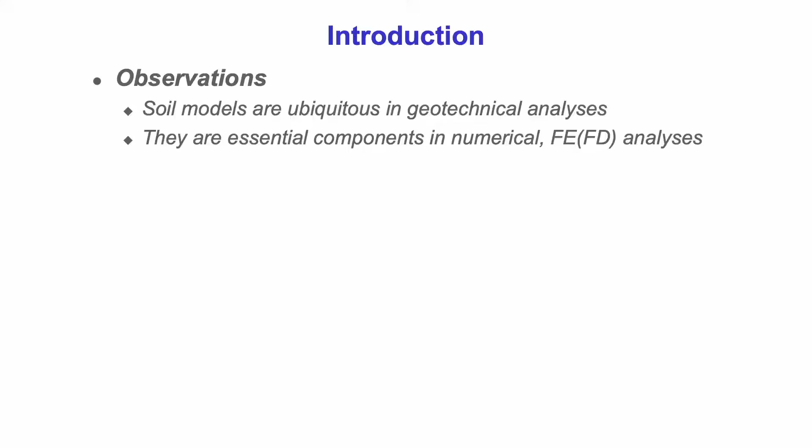My goal in the lecture is to share my experience in the development and application of soil models. Here I mean this to refer specifically to effective stress, strain, strength properties. I want to show you something about predictions of performance, some insights on geotechnical problem solving that I've gained, and I'm going to say very little bit about roles in design in this presentation today.

I'm reminded in advance that Karl Terzaghi himself wrote a book on theoretical soil mechanics in 1943, and he emphasized that theoretical soil mechanics was never an end in itself. And I just want to assure you that's the same philosophy I'm adopting here. So it's not so much about the model, it's about what you learn from the model and the lens it provides for problem solving.

Before I begin, I'm going to say the lecture's not going to do two things. It's not going to use any equations, because I think that's a little too much in a 1 hour session. And I'm not going to try and review the huge topic on the subject, because I know there are many other worthy pieces of work, but there just isn't time.

So my outline, what I intend to do is start by talking about soil behavior and generalized soil models. What do they do and what kinds of observations do they encompass? In the process of this, I'll show you some very interesting work we've done recently on modeling rate effects. This addresses a long-standing issue in geotechnical engineering about the hypothesis A versus B relation of consolidation and creep, which was first reported by Donald Taylor at MIT in 1942.

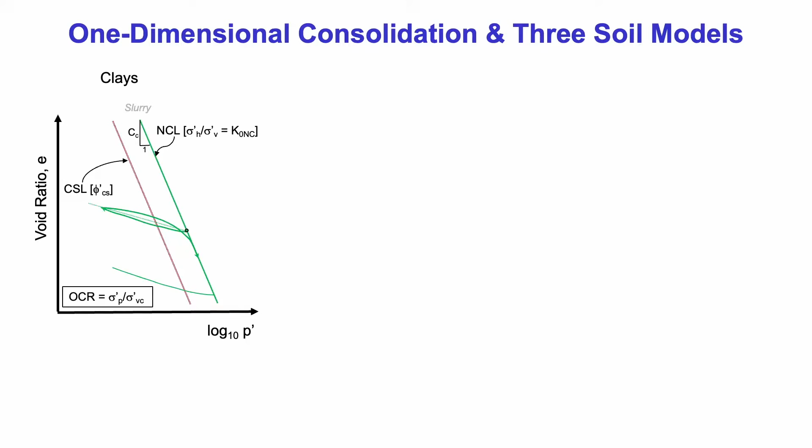You may ask yourself, what does the soil model that I'm going to describe do with this? First of all, I'm using an elastoplastic framework in the same way that the original critical state soil models did. But what I'm assuming is that we get anisotropy associated with normal consolidation. We see elasticity immediately upon load reversal, nonlinearity as we continue unloading, and when we reload, we're influenced by the proximity to the normal consolidation line through bounding surface plasticity.

So this is a model we called MIT-E3, which has existed since 1987. It's had a really good workout in the years since.

How does this differ from sands or silts? If you deposit a sand in a one-dimensional column, you will discover that the sand gravitates and settles at some range of void ratios, Emax and Emin. You'll observe the solid green lines, and you'll see a nonlinear response.

Cunningly, I've replotted the space, plotting log void ratio against log stress. But you see the curves coalesce at large pressures, many atmospheres of pressure. We refer to this condition as a unique set of states which are controlled by particle breakage, and we refer to it as a limiting compression curve. You can see the slope of it.

All of the data you see, all of the simulation in green here, represents an elastoplastic transition, involving plastic irrecoverable deformations. At low stresses, that's due to sliding and rolling.

This framework lets us unify clay and sand, especially when we overlay the critical states of sand. You'll notice that the critical state of sand looks very different to that of clay. It's parallel to the LCC line at high pressures, but at low pressures it has a very small gradient in this space, and we can reach conditions where there's apparently no strength of loose sands.

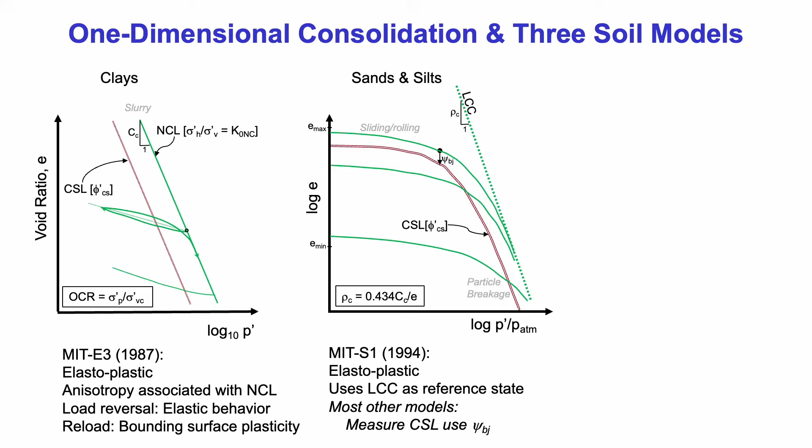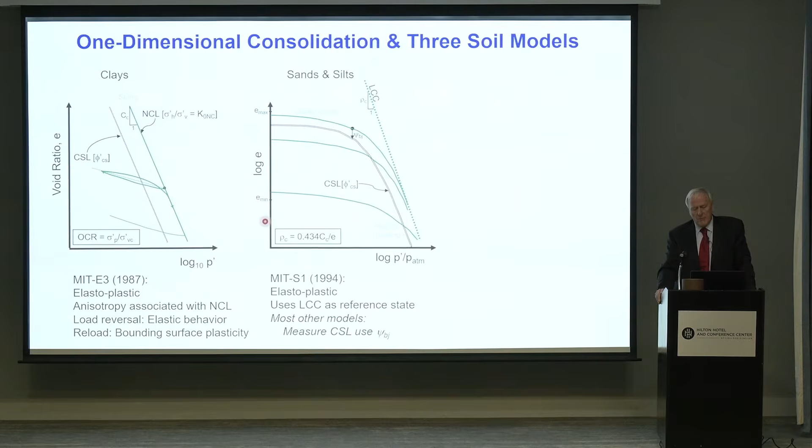This is formulated in a model called MIT-S1. I do apologize for these names, which came out in the early 90s. It uses the LCC as a reference state, and the important thing to emphasize is it differs from all other soil models, in that other soil models tend to measure the critical state and then relate the state to the critical state through a parameter psi, referred to as a state parameter.

Both of these two models are elastoplastic. They don't consider time, but time scaling is a huge challenge for us in clays. On the right, you can see the strain, or log void ratio against log time plot, that you would observe in a typical 1D laboratory consolidation test on a sample of height H1.

The little black square represents the end of primary consolidation, as you can see it, and then beyond that you have creep, governed in this case by a parameter called rho alpha, as shown here.

If you then transfer to the field scale, or to a much larger length scale, H2, what happens is that the time of consolidation is greatly expanded. The scale of the end of primary is a function of the drainage path length squared. You can see the black squares on the line H2.

In fact, there's big confusion about what to do with H2. If you assume that the strain at the end of primary is the same as it is in the small sample, you get the standard hypothesis A. On the other hand, creep will have taken place over a much longer time period, and you get a different curve. This behavior has confounded the geotechnical profession for years because we measure both things.

We describe this using elastoviscoplasticity. What's unique about this model, the MIT-SR model, is we describe the viscoplastic strain rates in terms of an internal strain history parameter which relates to the history of straining. We use a steady state parameter to be able to steer us between conditions where end of primary strain is constant and end of primary strain varies. If you put beta equal to 0, you get a unique end of primary consolidation.

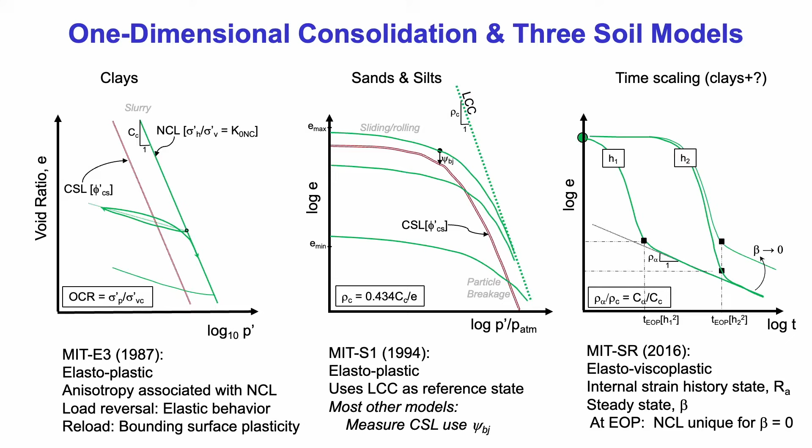Of course, one-dimensional consolidation is only part of a generalized soil model. You have to represent shear behavior. To do this, in elastoplasticity, you have to introduce yield surfaces.

Here is an example of a measured yield surface for a clay. The circle point at the center is the in situ stress state. This is a block sample obtained downhole, and the arrows show different tests done in different directions in the effective stress space. The interpreted yield points are plotted as square symbols, showing an assumed yield surface oriented away from the hydrostatic axis towards K0.

In the modeling I'm describing, we're following that logic. We believe that the yield surfaces are anisotropic. When we first started, we used an elliptical surface, the green surface, and later, with the S1 model, we used a lemniscate surface, which fits the data rather better.

What is truly remarkable about soils is I can show you very similar results for a sand. The figure on the right, with a different stress scale, shows the sample initially made at condition state A and unloaded to point B, giving it similar proximity to yield as the clay. You can see the stress paths and yield points, and we end up with a yield surface of similar shape, well described by the MIT S1 yield surface. So sands and clays can be unified with a single yield surface.

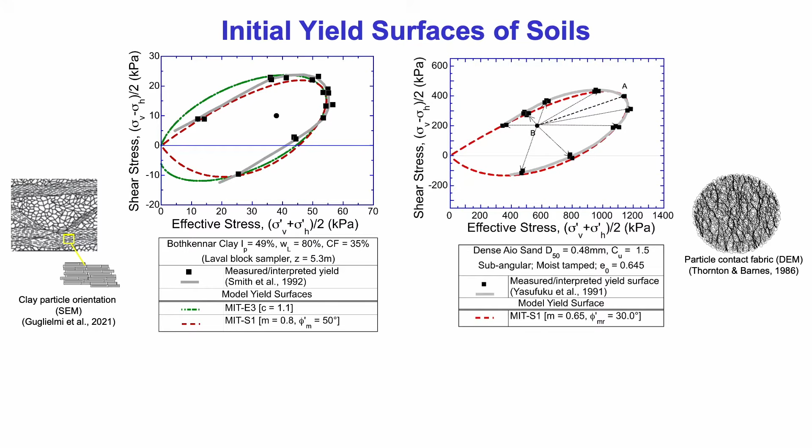So what I'm asserting in this figure is the measured data can be captured using an elastoplastic model with a single yield function. Inherent anisotropy in both cases is linked to the prior consolidation history, and rotation is related to the particle fabric.

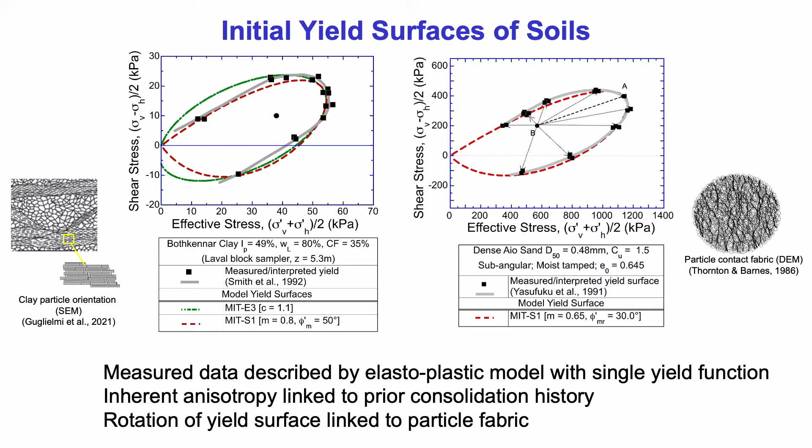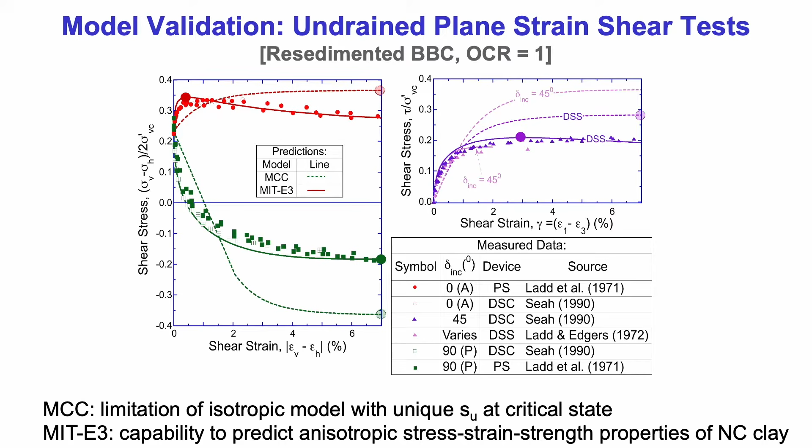Here we stand today in 2025, 100 years after Terzaghi first lectured at MIT. And of course, you can ask, what have we learned in the last 30 years about the model?

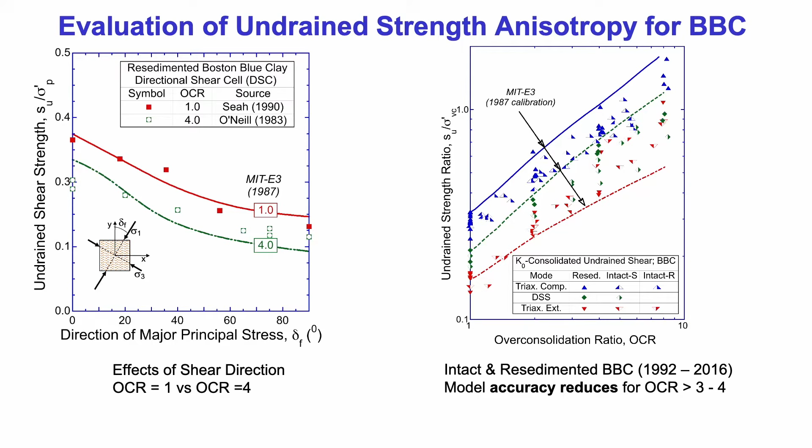We have a very rich data set for the Boston blue clay from the local area. If you compare it with the model as calibrated in 1987, you'll see the model does a very good job bounding the anisotropy at low overconsolidation ratio, but it tends to exaggerate the anisotropy at higher overconsolidation ratio. The way I expressed this at the time was to say that the model accuracy reduces for OCR 3 to 4. My approach is basically to accept the limitations of the model. I haven't attempted to edit the model formulation, and I've made no adjustment to the input parameters, so this gives us a very stable platform on which to make simulations in Boston blue clay.

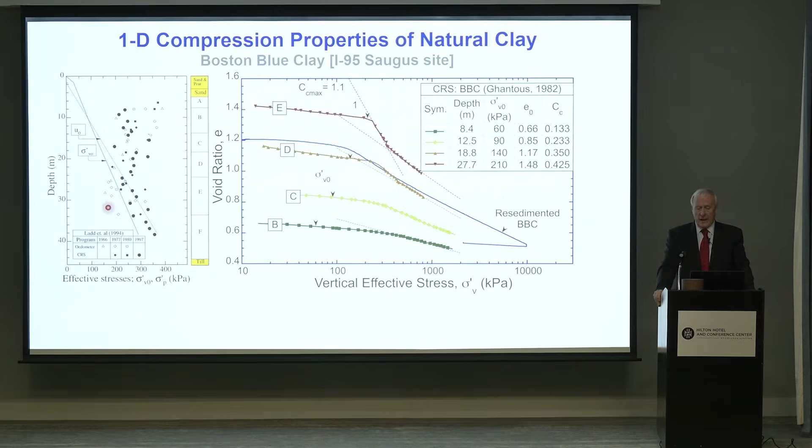You need to look very closely at this plot. You'll discover that the soil from the highest part of the clay, layer B, has a much lower void ratio than layer E. This is a complete inversion of logic, because it says the shallower clay has a much denser state than the deep clay. So this is confounding in all dimensions.

We don't get a pretty plot with just a simple normal consolidation line. In fact, that slope C sub C varies widely. In layer E, we get a sensitive clay which breaks down, and C sub C varies enormously, and you can see how this varies through the different layers. For reference, I show you resedimented clay in blue, which is kind of an average of the above. But the legend shows you that C sub C varies across all these samples.

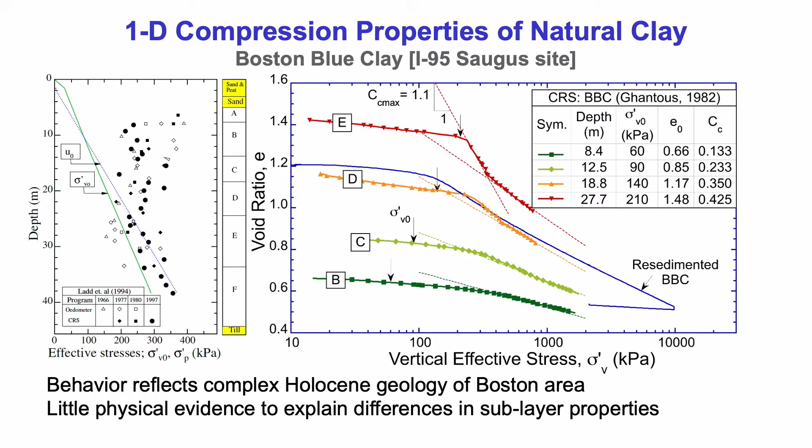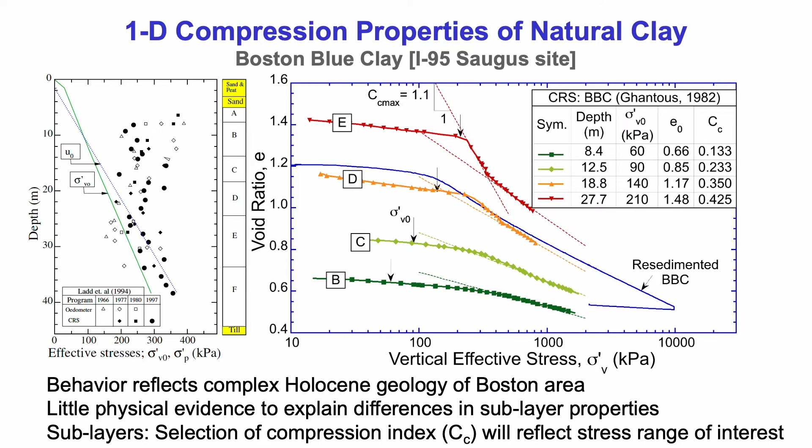Why does this happen? It reflects the complex Holocene geology of the Boston area, the way Boston is located at the southern perimeter of the last great glacial ice sheet. It's a complex history. But one thing I'd like to tell you is if I showed you samples of clay from E to B, you would see very few differences in sublayer properties. So in fact, we're confronted with the fact that clays are quite complex. And if one wants to model a clay layer like this, where all of B to E are simply called Boston blue clay, you're going to have to adjust the compression parameter C sub C to reflect the stress range of interest and the sublayers of interest.

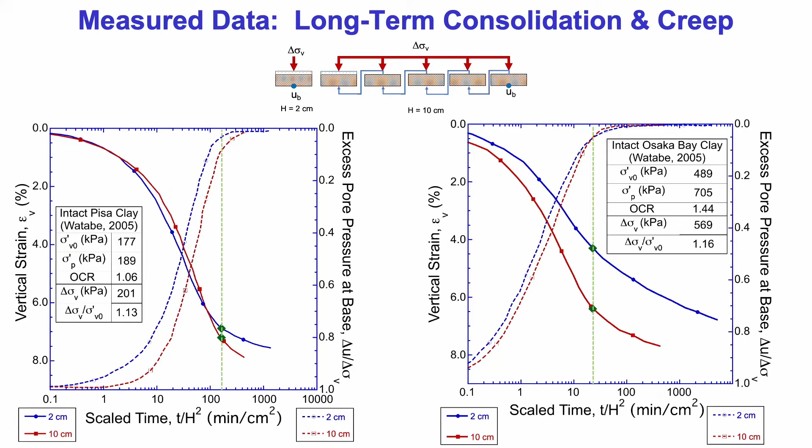Here is an identical set of tests for Osaka Bay clay in Japan, color-coded exactly the same way, but you can see there are much higher strains for the 10 centimeter thick sample at the end of primary consolidation than for the 2 centimeter thick sample. In other words, it obeys hypothesis B. So here we have two very well documented clays tested under identical conditions giving different behaviors. It's confounded us.

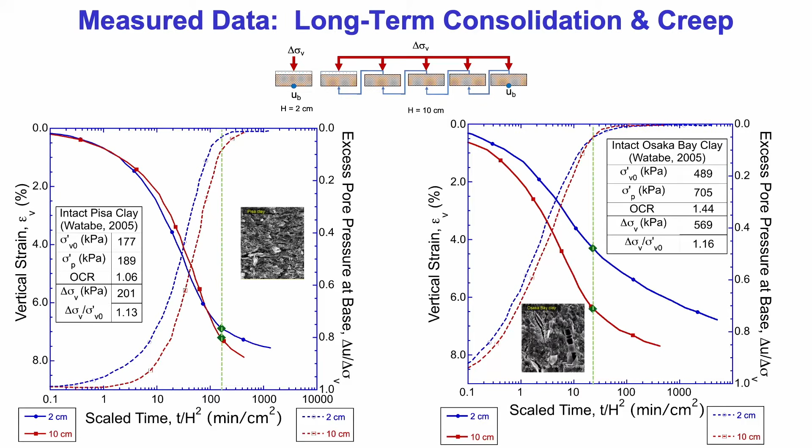We wonder whether it's due to some feature of microstructure, like microfossils. There are a few of those in the Pisa clay, whereas the Osaka Bay contains a profusion of diatoms. But the truth is, whatever is causing it, we have materials which behave differently when we scale the lengths.

So we built a model to try and capture this. And this model, as you can see, can produce either result.

What you're seeing on the left are simulations from our model, simulating one-dimensional compression of 2 and 20 centimeter thick samples. The key thing to look at is the void ratio or strain, and I've put little square markers indicating end of primary. In one case, hypothesis A, we get a unique end of primary void ratio, achieved by putting beta equal to 0. If we vary beta, we achieve hypothesis B. In other words, we can calibrate this model for either of the two scenarios I just showed you.

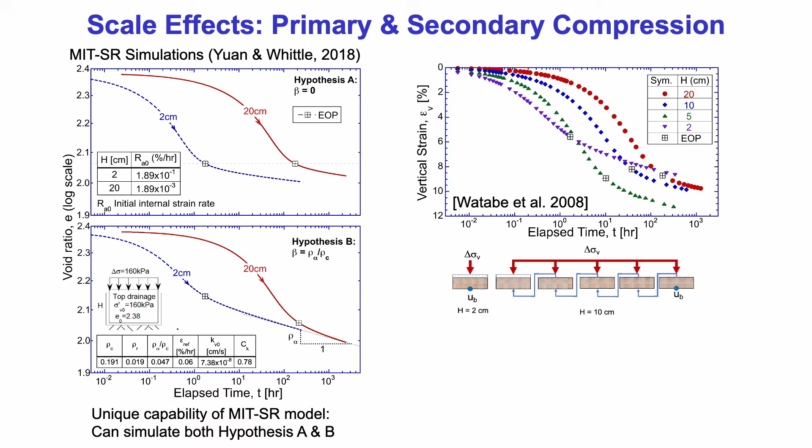Here is a data set from the Osaka Bay clay with samples from 2 to 5 to 10 to 20 centimeters, color-coded, and again I mark the end of primary strain. You'll notice the data are conflicting—it's hard to know which calibration makes more sense. So I offer you two calibrations: one assumes we have a unique end of primary, that's the top figure, and one assumes the end of primary varies. You can see we can't fit all of the data, so we can bound the data, and the data are quite confounding to us.

But we have two calibrations which bracket what's going on, consistently described by this soil model, unlike any other soil models, I should say. Is this useful?

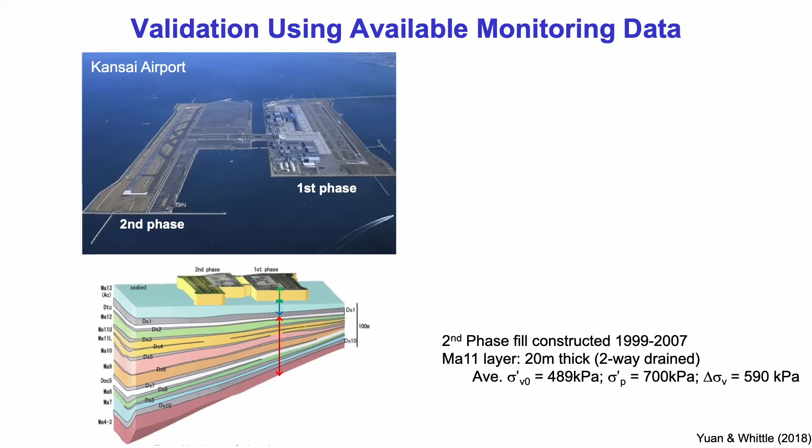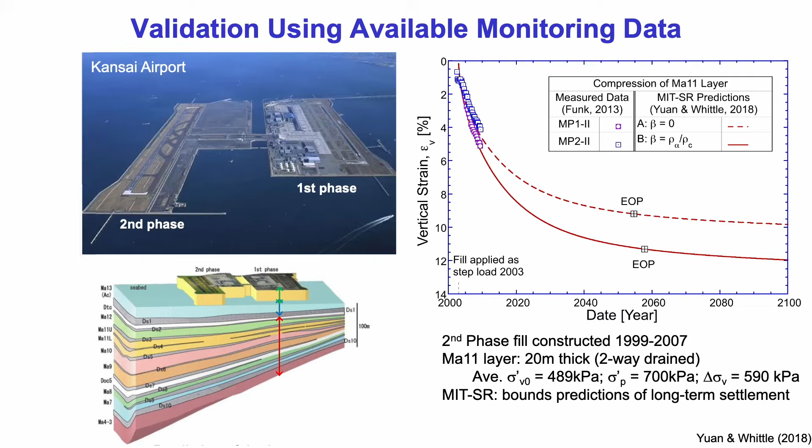Here are the data, showing strain against time in years, and then the simulations with two different calibrations shown in solid and dotted lines, with end of primary occurring somewhere towards 2060. You can see that they do indeed bracket the data currently available, but it's going to be very interesting to find out what happens over the next 20 years or so. But we claim we've now got a model that can handle these diverse observations, which we think is important, so we can bound the predictions of long-term settlement.

Okay, let me turn now to using these models in real situations, real-world applications. I'm going to start out with work we did on excavations.

We asserted at the time this project was proposed that it could be built safely without any ground improvement, as a floating support system. Our predictions using the MIT model were included in the construction bid package, and we followed up with Class C predictions after construction was completed. The only thing that changes between Class A and Class C is that we updated the excavation timeline to reflect the actual construction, and we used the actual measured strut preloads.

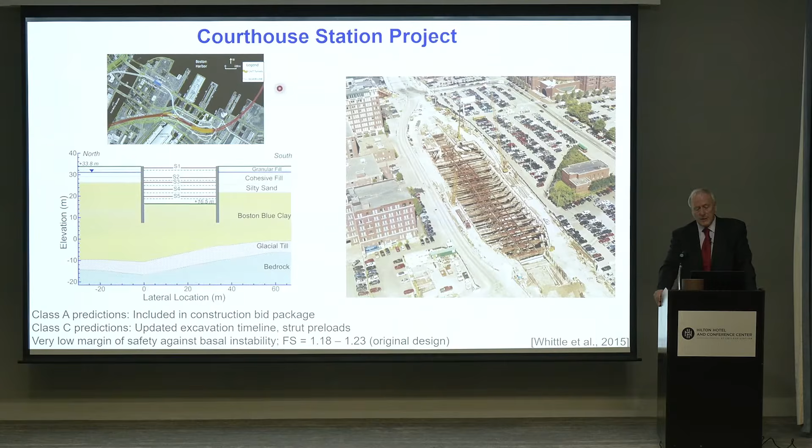The student who did the Class A predictions worked for the company that installed the monitoring data. She actually designed the instrumentation and monitored the project. I was not involved at that stage. I only got involved in Class C after the project was completed and closed out.

Why is this such a great project? Well, we had a lot of soil property data available in South Boston, thanks to my colleague Chuck Ladd. He did a very detailed site investigation in the vicinity of the project I'm talking about.

You can see the stress history, the familiar plot from people working in Boston, of a clay which is very nearly normally consolidated at depth and has a deep over-consolidated crust. In the middle panel, undrained strengths compare measured data with model representation, and on the right, hydraulic conductivity. So we had a lot of useful data for calibrating site conditions.

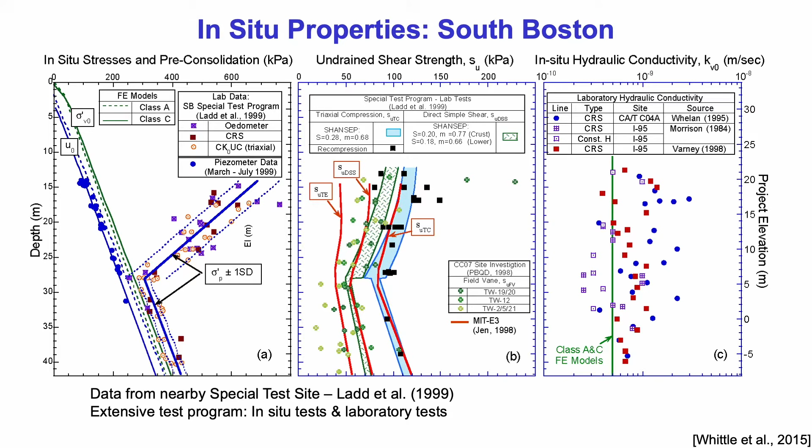During the course of this work, the soil modeling told me one thing, which is it was extremely important to have accurate stability analyses, and we really felt that the stability analysis may be misleading. So I got involved in improving stability analysis in geotechnical engineering using a technique known as numerical or finite element limit analysis, which I've abbreviated NLA. This was done in collaboration with the late Scott Sloan from the University of Newcastle in Australia.

What you do here is use a conventional finite element spatial discretization, but you solve upper and lower bound plasticity for rigid plastic material behavior.

If you consider what I just showed you for an excavation, this is a simplified version of the problem. You can see we have a set of struts which are designed not to fail. We have a wall which bends, that's the plastic moment parameter, and we have a clay, and I've chosen here to show you a uniform clay with undrained strength SU. The embedment depth D of the wall contributes to the stability of the excavation.

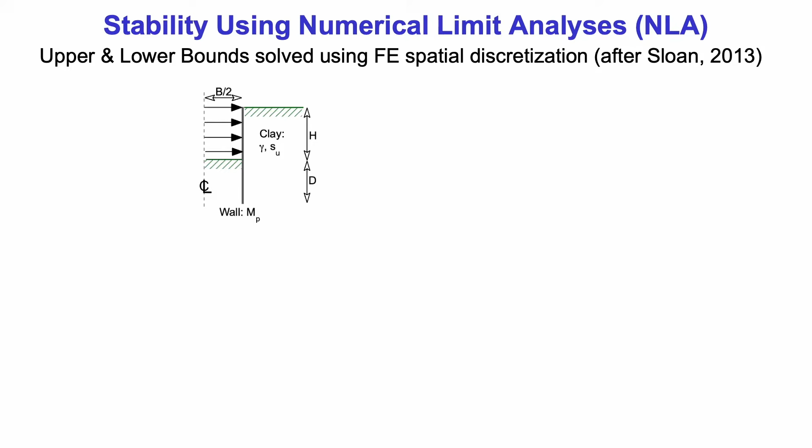Here are the results we obtained as a measure. The factor of safety is surrogated here with the stability number, gamma H over SU. This plot I actually showed in the Buchanan Lecture in 2013, and it's showing a combined failure of the wall and the soil. You can see this on the horizontal axis: the relative strength parameter is the ratio of the bending resistance of the wall to the undrained strength and the embedment depth squared.

If you go to the left-hand side of this plot, the wall bends and fails very easily. You go to the right-hand side, the wall is strong enough that it doesn't fail, so only the soil fails. When I came in 2013, I proudly showed off what's written here as the original NLA, the colored bands, and I said this isn't a bad estimator of the factor of safety. You can see that we can bound the stability for different geometry conditions of excavation support systems.

I was quite criticized for this because people said it's not accurate enough. Nowadays, we have commercial finite element codes that solve these problems. We have a program called OptumG2, which has some very clever adaptive meshing.

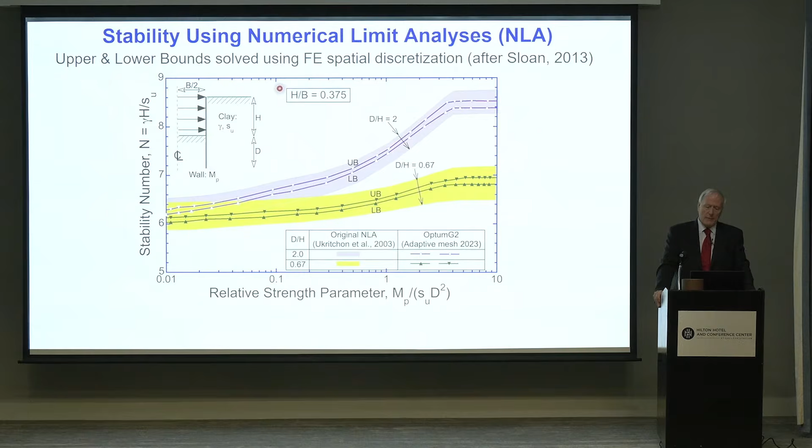So I asked one of my current PhD students to rerun the analyses. In an afternoon, she came up with the tram lines, the dark green and triangle lines in both bands. You can see we now have almost perfectly accurate results, and we're narrowing down that factor of safety, so we have a really good predictor.

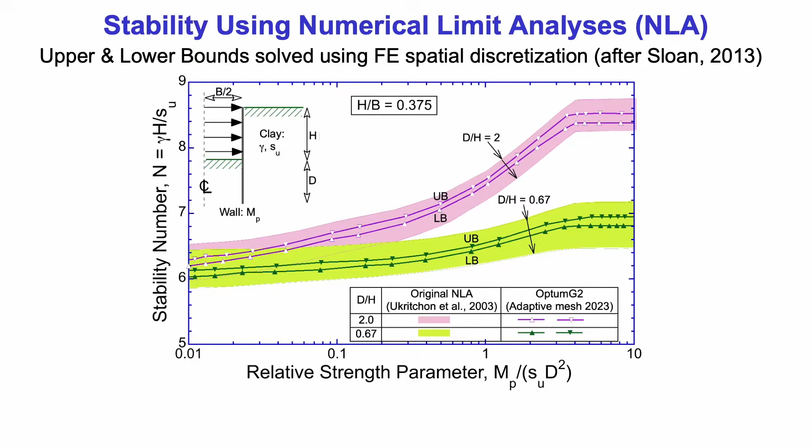I would assert today for many geotechnical problems we can make very accurate predictions of stability. This is a remarkable accomplishment, and it's the first time that I'm aware that we have essentially a design method dealing with combined failure of the soil mass and bending failure of the wall.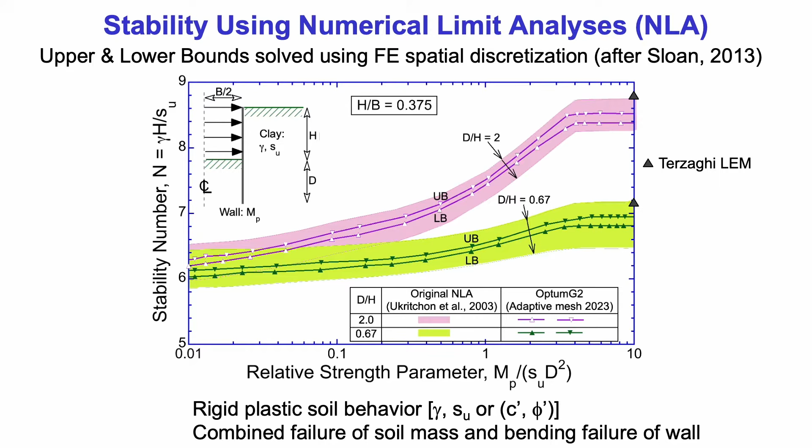So we reran the courthouse station. We asked if we had the best tools that we have today, if we had had them back at the time, what would our assessment of factor of safety be? We came to a number something in the order of 1.35 to 1.37. So the margin of safety against stability when we had better analysis was somewhat higher than when we first did the Class A predictions, which I suppose is a relief, and maybe one of the reasons the project worked out so well.

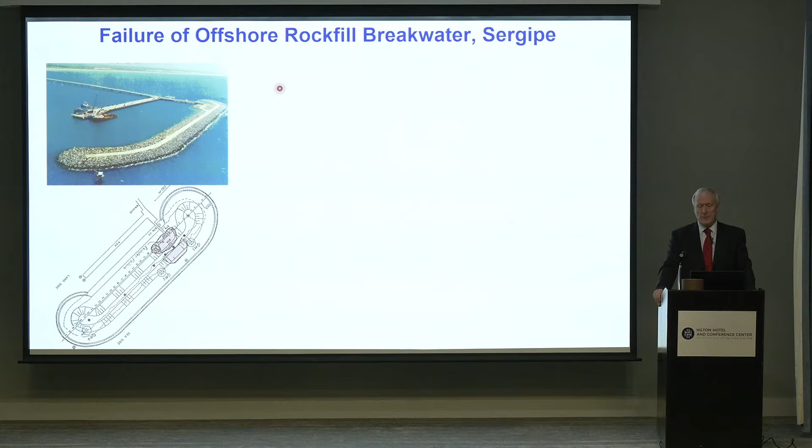Of course, when you do excavations, you're primarily interested in undrained shear behavior. Consolidation occurs only if you leave the excavation hole open for extended periods of time. In contrast, when you build things on top of soft clays, you rely on the consolidation process for the soil to gain strength. This is a case study which was in sort of the archives.

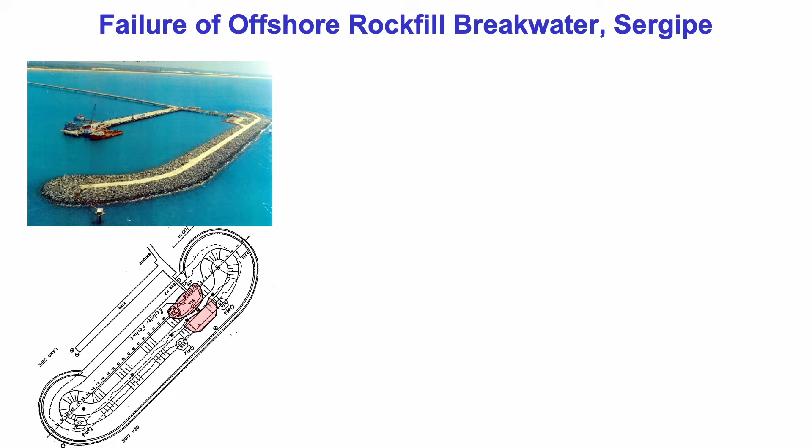It's the failure of an offshore rockfill breakwater in Sergipe, Brazil. Here's the cross-section. You can see that the underlying stratigraphy involves rather prominently a 7-meter thick layer of soft clay. The construction involved creating a geotechnical berm, which involved barge dumping of boulders directly onto the surface of the sand. Then sometime after the creation of stage 1 geotechnical berm, the rock fill was constructed by crane placement of boulders and was originally intended to reach a height plus 6 meters.

Failure occurred during the construction of the stage 2 rock fill. Again, I've picked this case study because we had a lot of good data associated with a forensic study done by Chuck Ladd and Shunmin Lee in 1993. They ran a series of lab tests. They actually calibrated both CAMCLAY and MIT E3 soil models, which we've seen already. They didn't, at the time, do any analysis of stability by these methods.

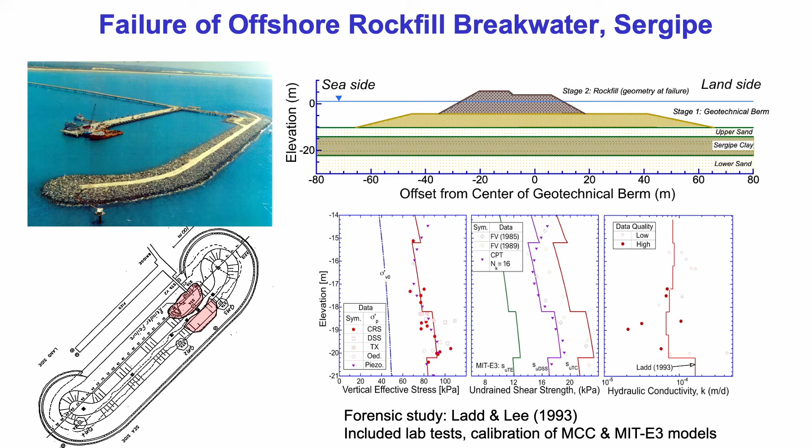So how do you do undrained stability for a stage construction? Well, one approach is to follow Ladd's Terzaghi lecture from 1991 and do an undrained stability analysis. How does this work? Well, what you do is you consolidate the clay, you actually simulate the consolidation, and then you periodically interrogate the model by asking what is the available undrained resistance and what is the factor of safety based on that. So this is doing what Ladd would recommend from his 1991 Terzaghi lecture.

The property that we're using is computed by the MIT E3 soil model. So what you see on the figure on the right is a measure of the factor of safety, which is the weight of the stage 2 compared to the actual weight. You can see the construction day, I put it on a log scale. The actual failure occurred with the red diamond. You can see the MIT model showing how the factor of safety would vary with time. In fact, more than 1,000 days are required to achieve substantial consolidation and stabilize the structure. The model doesn't predict accurately the time to failure, but it predicts very closely. Whereas simpler soil models based on isotropy overestimate the factor of safety.

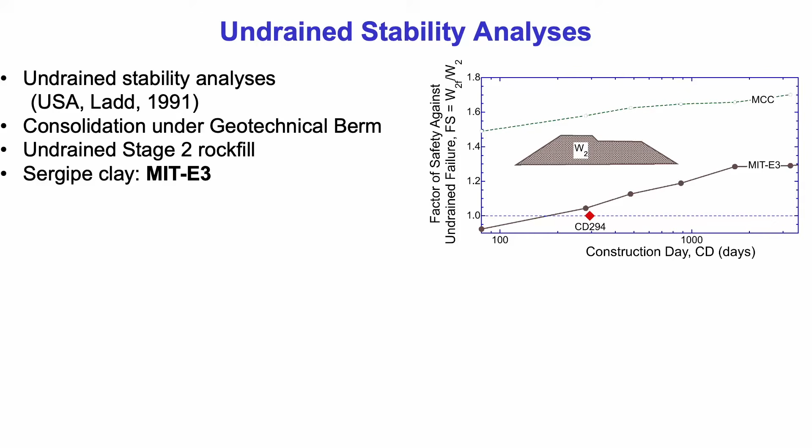A second, more challenging analysis is to see whether the model could actually predict deformations and pore pressures that develop over time.

This involves us needing to know the fill elevation and the actual construction sequence. It's easy enough to work out the maximum height of the fill, but for the construction of the geotechnical berm, we don't know the sequence of filling. We just know it was barge dumped. So the analysis of stage 1 geotechnical berm is quite challenging for us. We have to make assumptions.

This particular site did not have a lot of instrumentation data. It had a single inclinometer, VT1, and it had some pore pressure measurements.

When we do our analysis, you can see that when we came to the simulation of deformations, we do quite well, providing we use Model 2, where we assume that the barge dumped material spreads out laterally across the structure. That works quite well for us, and we end up with quite reasonable predictions of the magnitudes of the pre-failure deformations and pore pressures.

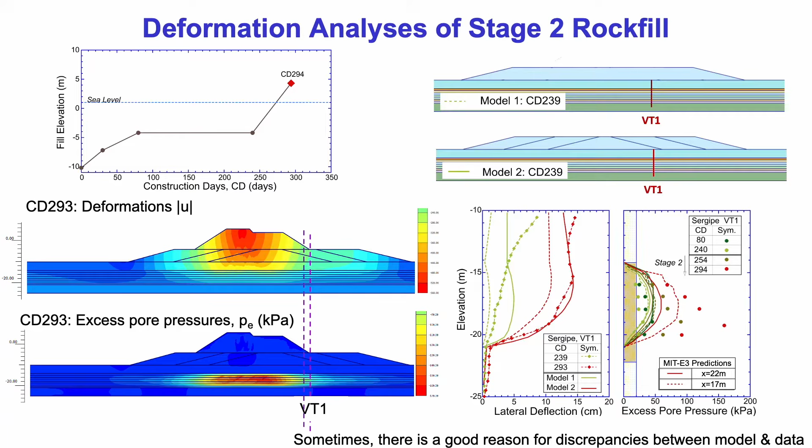On the bottom right, we found some of the pore pressure measurements greatly exceeded the surcharge load, which is a physical impossibility. So we know the data are not very reliable. But the predictions of earlier stages were very well done. So sometimes there's a good reason for discrepancies between the model and data.

I'd like to turn to the last example on foundations. This is the Millennium Tower, known as 301 Mission Street in San Francisco. This is a 60-story, 184-meter high, reinforced concrete frame building with a 1-story basement. It's been much in the news. It has a 3-meter thick foundation mat, and it's founded on piles.

You'll notice those piles toe out. They're about 16, 17 meters long. They toe out in the sand layer, the yellow layer. The whole structure is underlain by what's called the Old Bay clay, which is a very stiff but lightly over-consolidated material. The original designers thought that that material would be very stable as a foundation.

They didn't just build a tower at this site, they also built a podium structure, which is a 38-meter high mid-rise. And before they could build that, they excavated a 16.7-meter deep basement with another mat. There was a perimeter soil mix wall, but one of the biggest challenges in their design is they didn't cut off the groundwater conditions inside the basement of the podium. So as a result, they inevitably dewatered the area around the basement of the Millennium Tower.

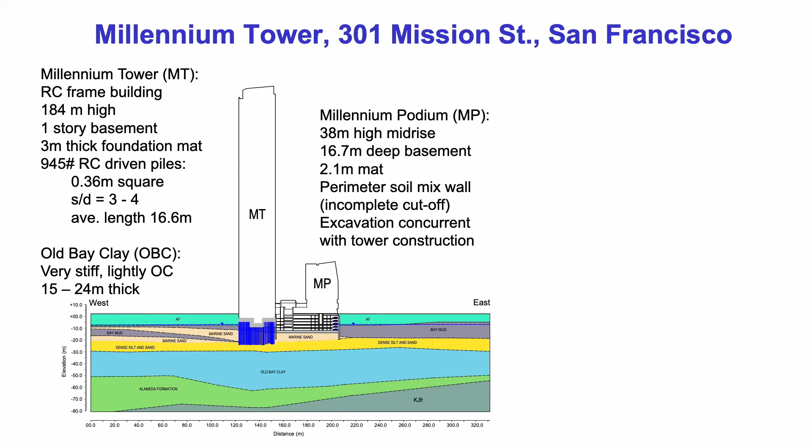The construction of the Millennium Tower and podium was finished in 2009, and ground movements and tilt of the structure were already prominently known and exceeded the design expectations.

My involvement in this was part of a whole group of people going through the mediation process about coming to a financial settlement of the costs associated and the repair costs for this project.

Why is this a very interesting project to use a soil model? Well, we could say immediately by just looking at the stress change that the tower was going to load the Old Bay clay into its normally consolidated region. So it was going to exceed the pre-consolidation stress, at least in part of the layer. And therefore, we know as geotechnical engineers, we expect larger settlements.

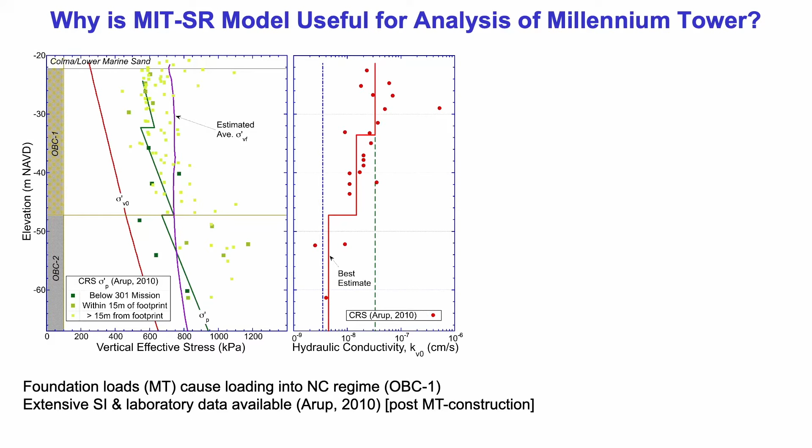We also had many other data points. This is all, in fact, due to a very extensive site investigation and laboratory test program performed by ARUP, who were the geotechnical engineers of record for the Trans-Bay Transit Center. These data were obtained after the end of Millennium Tower construction, so they wouldn't have been available to the original designers.

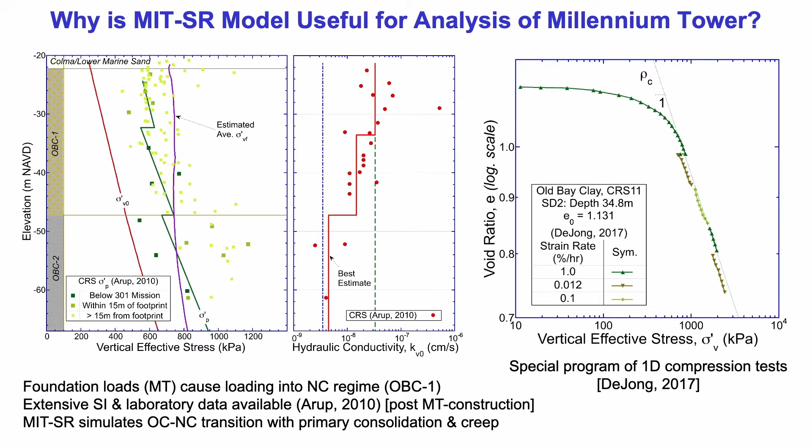When I joined the project looking at this, we also had some special test program run by our colleagues at UC Davis, Jason DeJong, who had measured how the compression property varied with strain rate. This is a key parameter that can be used to calibrate the MIT-SR model. So we found ourselves in possession of a soil model that we believe could represent the Old Bay clay and capture all the behavior that might be affecting the properties of the tower.

I'm going to show you some results of foundation settlements. The first one is simply looking at the tower.

If the only thing they built was the tower, what would we have predicted? I chose for the measurements just the midpoint, and the simulations are color-coded according to the corners of the tower. You can see the smallest settlement in the southwest corner and the largest in the northeast.

The solid and dotted lines differ only by the effect of a drawdown associated with podium construction, lasting until 2020. This was a 4.6 meter drawdown. You can see the drawdown adds to the settlement but doesn't affect the direction of the tower tilt. By the end of construction, more than 20 centimeters of settlement had already occurred.

We've done models which are much more complex. Here's one which includes the podium construction at the same time. Same color coding, same everything, and you'll realize the tower alone would tilt south to north, whereas with the podium it eventually moves towards the west. So there's a different orientation of the tilt, meaning a large effect of the podium on the mat tilt direction.

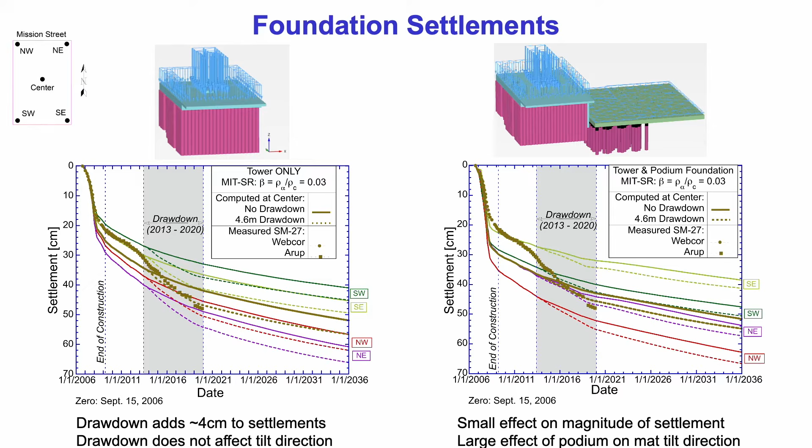It's hard to look at data for the mat measured directly because there are all kinds of details in the structure that make mat measurements challenging. But you can easily look at the roof level deflections of the tower. If you assume there's a planar deformation of the foundation mat, you can map out the tilt in both the north-south and east-west directions. That's what's shown in this figure.

The data are shown in the symbols. Here I'm quoting work done by my colleague Yusuf Hashash, who used a best-fit plane. You can see the tower tilting towards the north, with a large tilt at the end of construction and a very slow increase thereafter.

You'll also see in this figure the model predictions of the tower and podium together, and they predict the same amount of tilt towards the north. In other words, we're capturing this phenomenon quite well. The drawdown and podium have little effect on the north-south tilt.

You'll notice some features in the data that are not predicted. That's because this model doesn't include the buttress which was installed. Installation of the buttress causes the tower to tilt towards the south - that's what that bend is. We also didn't include the other features of the other construction.

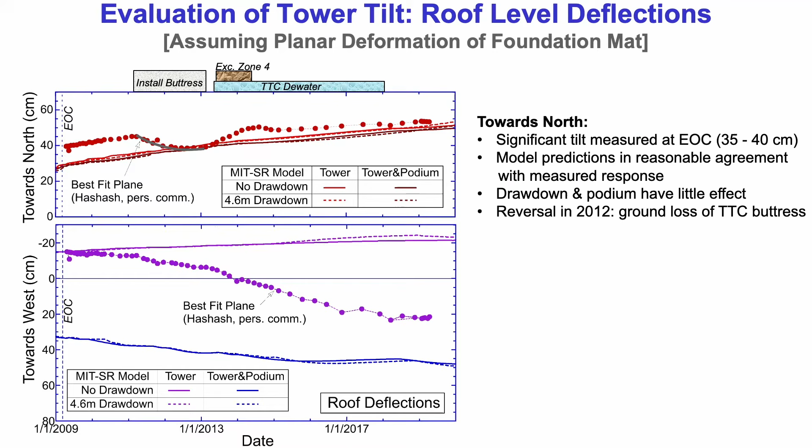Now look at the tilt towards the west. The two models differ hugely - the tower alone is in purple and the tower and podium in blue - and you can see they differ in direction. The measured data suggests the tower tilted to the east initially and then slowly progressed towards the west. We're not capturing this at all.

What we're in fact saying is that podium construction had a major impact on end-of-construction predictions, which really isn't realistic at all, and the subsequent east-west tilt is not well predicted. Here's an example: if we move the tilt up here, you can see we're underestimating what was observed.

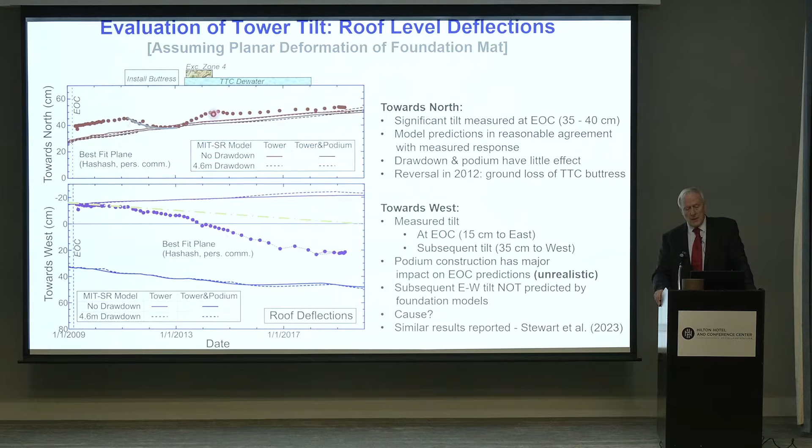This puzzled us for a very long time. We haven't tried to fit the data, but we were relieved when we realized that everyone else was having exactly the same experience - other experts from other parties had exactly the same experience. So it tells us there's something more to be found out about the behavior of the tower.

I'd like to turn to sands. Sands are very tricky to model also. This is a recap of what you can get with a model such as MIT-S1. You'll see that the model can predict very diverse stress, strain, and strength properties and behavior in drained shearing in lab tests - that's what these green and blue lines are showing.

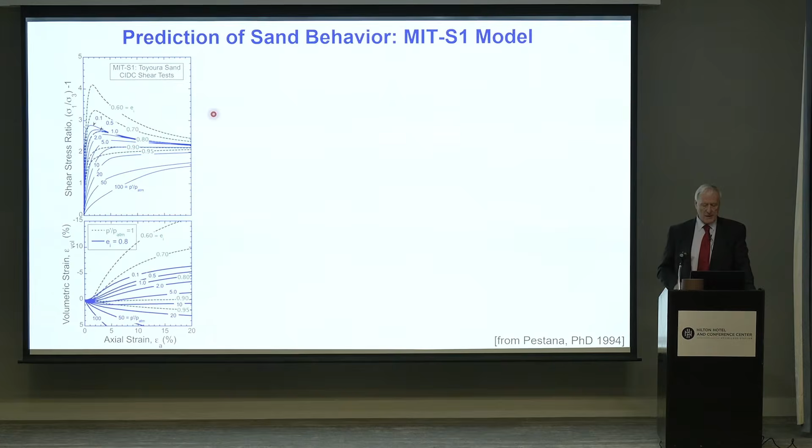They're showing the effect of confining pressure and density on the stress-strain properties. They actually show things that all soil mechanicians know: dense sands dilate, loose sands contract, and the amount of dilation is very dependent on the stress level. This is the result of the remarkable PhD thesis of the late Juan Pestana.

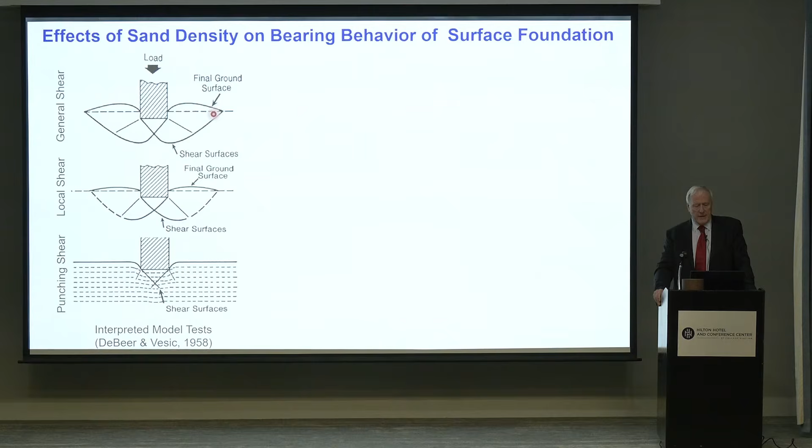Well, you can consider interesting problems. A classic geotechnical problem: bearing capacity. When I teach bearing capacity to undergraduate students, I often show them the results of model tests performed by De Beer and Vesic in the 1950s. What you discover is that there are different mechanisms of bearing resistance that appear according to the density of the sand. The top figure, general shear, is only ever observed in dense sands and resembles closely the Prandtl failure mechanism. The punching shear is for loose sands and looks completely different because there's much more compression of a loose sand.

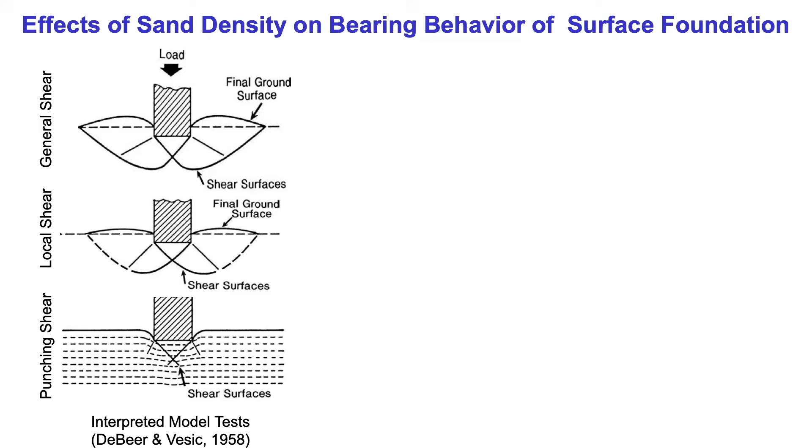Existing soil mechanics techniques of estimating bearing capacity do not capture these mechanisms, but a soil model that represents everything I just showed you can. So here is predictions of strains and deformations occurring under a footing, a large footing. The top figure is a very dense sand and the bottom one a loose sand.

They're color-coded to reveal that difference that you see on the left. The orange is the zone of dilation, where the volume is increasing, and you'll see large upward movements of the surface adjacent to the structure. The orange throughout the mass is showing that we're getting volumetric increase throughout the mass. When you go to a loose sand, you'll see a large zone of blue indicating compression and almost downward movements almost everywhere and very little dilation anywhere.

So this comes out of simply starting the model in a simulation at different void ratios. And therefore we can predict the stress-strain curve. So we are correctly predicting qualitatively the deformation resistance of the foundation on sand, of a surface foundation.

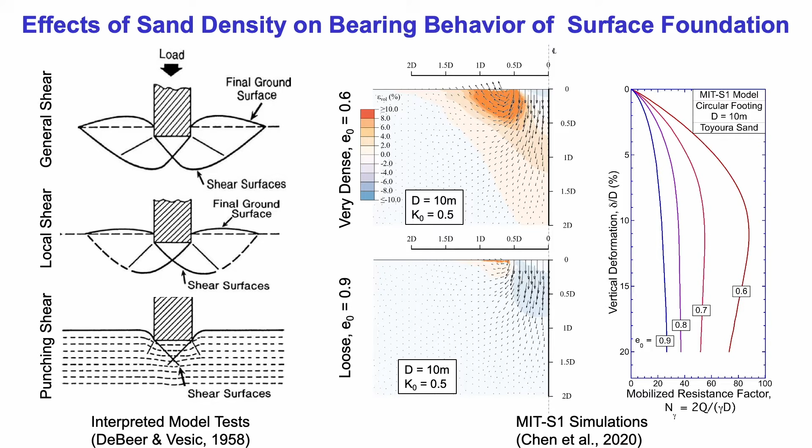We've done many of these studies and compared them with measured data. We've looked in particular at the bearing resistance. This is showing a summary of the bearing resistance factor, or bearing capacity factor N gamma, against the footing size. So as you move to the right, you're dealing with much larger footings. I've color-coded this to show the effect of the initial void ratio, and I'll point out the measured data in the symbols, and they match rather closely. So we know that N gamma varies hugely with the initial void ratio and with the size of the foundation.

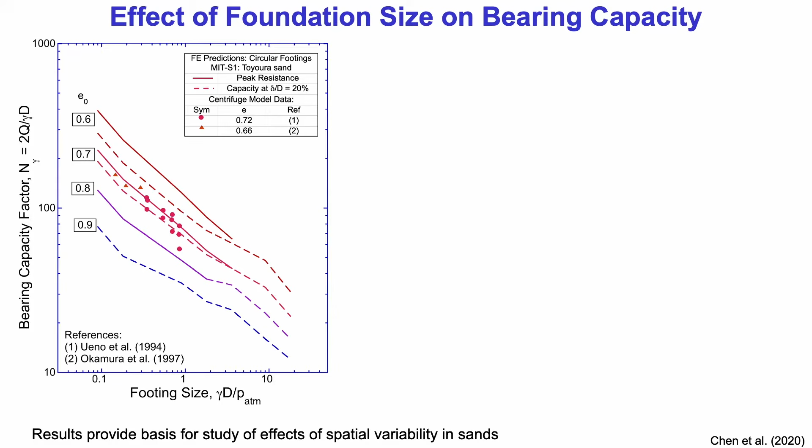Bearing problems in sands are not always that important, practically speaking, but this provides a basis for something else completely new, which is we can now consider spatial variability in sands. Varying void ratio as a state parameter, we will capture all of the stress, strain, strength properties through changes in void ratio. And therefore, we can start to represent realistically what happens at large scale.

Last problem, sands, I'd like to draw you to another problem. The last 5 or 6 years, I spent a lot of time looking at stability of tailings. This was really motivated by a video which appeared in January 2019. What you're seeing in the video here, there's two snapshots, A and B. They're about 10 seconds apart. What you see on the left is an 87-meter high dam that was built over a period of 37 years, and it stores iron ore tailings in Brazil. The dam was constructed and finished construction 3 years before this failure occurred.

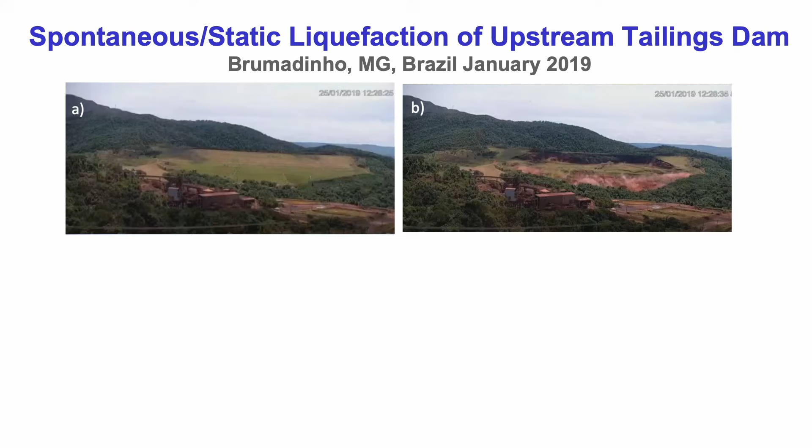What you see in B is the spontaneous liquefaction of this entire mountain of tailings. It's an extraordinary piece of video, and it comes from a security video. This is actually the Córrego do Feijão Dam number 1. It released 12 million cubic meters of iron ore tailings.

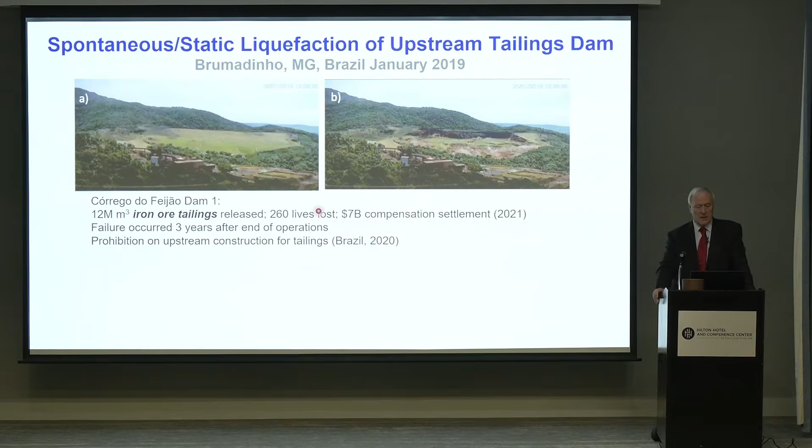More than 260 people died, and the initial compensation settlement was $7 billion. I read in the New York Times that ongoing environmental litigation in Brazil has added another $25 billion associated with this project, and the Brazilian government has mandated an end to all upstream construction in Brazil. Not only are they doing that, they are dismantling many existing upstream constructions and relocating them at enormous cost. So what is an upstream construction?

You can see the cross-section of this structure. The tailings are the red, yellow, and green. This is the material which was deposited through hydraulic fill. The red are low permeability slimes, the yellow are high permeability sandy-like materials, and the green are something intermediate with more silt content. The hydraulic deposition ends up with a large spatial segregation and difference. The dam structure is permitted in a series of rises, and this took almost 37 years.

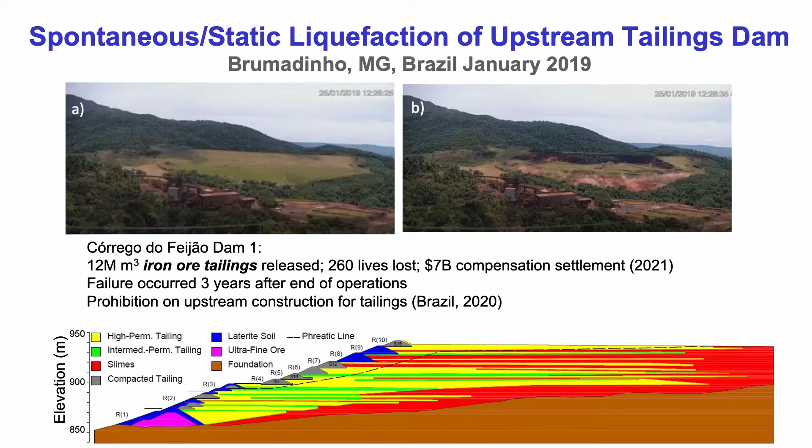So how do we analyze spontaneous liquefaction like this? This is clearly a very dangerous type of failure. Most people start out by saying, well, it involves undrained shearing of the tailings material. So let's look at the simulation of undrained shearing of sands.

You can see in this figure stress strain curves and stress paths measured for a sand, Toyoura sand, and then the simulations of the MIT S1 model. You'll notice there's generally good agreement. The results show a range of void ratio, two different void ratios that show a range of consolidation stresses. It shows critical state at large strains, and the agreement with the data is very good. Some of these tests, number 2 and 3, show instability points where undrained shearing is associated with a peak resistance, and that's indicated with the red dot.

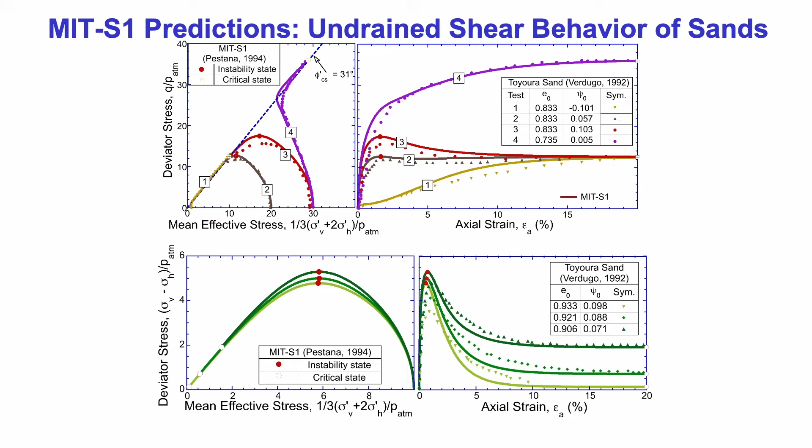If we go to even looser states, we can find that the sand in undrained shearing will exhibit a peak, a very large post-peak softening, and a very low residual critical state value. This is the concern in liquefaction, that you exceed the peak and you get a massive loss of resistance. The model works well for this.

None of this is enough to explain failure of Feijão. For this, we need to consider triggering. And triggering says that the dam is stable, and it's stable, and then until something happens, something triggers a failure.

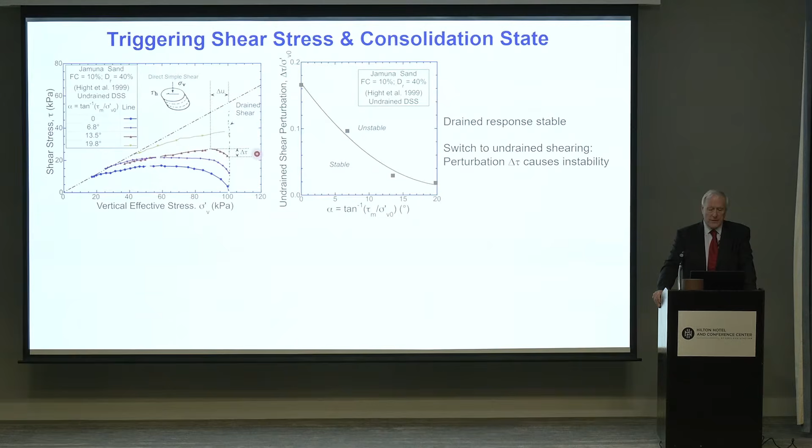The data in colors are what happens when you start doing undrained shearing at different conditions along that path. Hopefully you can see by looking at the red one, delta tau is the perturbation shear stress that you can impose from that starting condition, which will bring about a peak resistance. You'll see the perturbation gets smaller and smaller the closer you move up that drained stress path. In other words, as you increase the slope angle, the perturbation you can tolerate gets smaller and smaller. This is obviously a huge issue in the design of tailings structures and others.

MIT S1, I haven't tried to emulate this particular data set because it comes from another site, but I just want to show you that qualitatively we get exactly the same result for the MIT S1 soil model. In other words, we have a model that is capable of predicting triggering.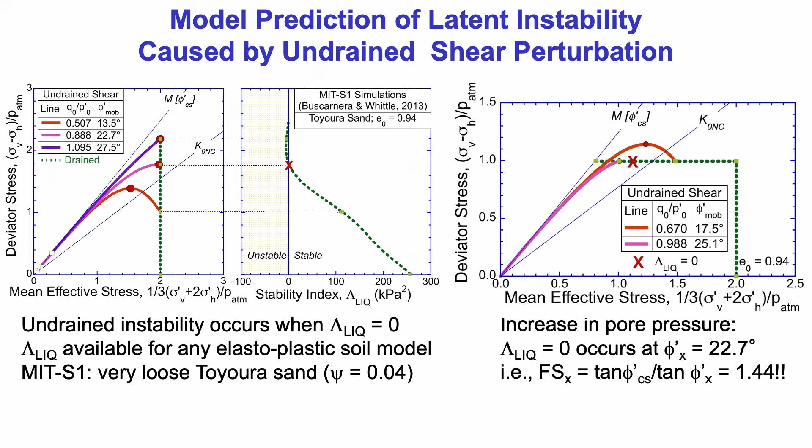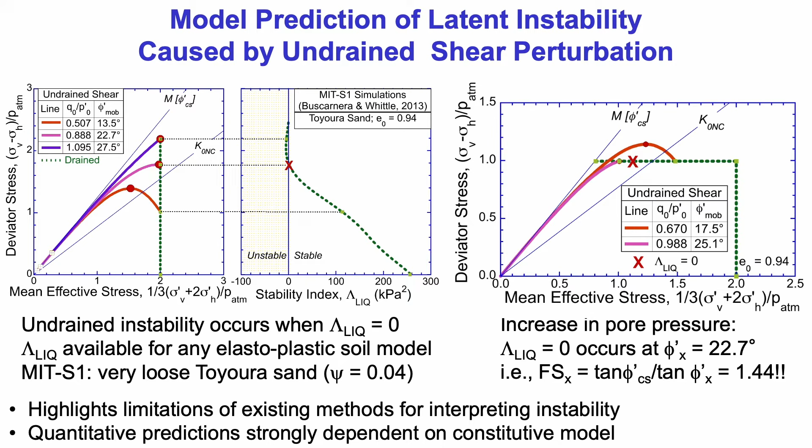If the factor of safety against drained failure is below that number, we may have no undrained capacity available. The beauty of this methodology is we can apply it to any soil model, and there are many different soil models used today for liquefaction analysis, so this could apply to lots of other work. Unfortunately, it also highlights the limitations of interpreting instability, since quantitative predictions will be strongly dependent on the model used and its calibration. Why is this a challenge?

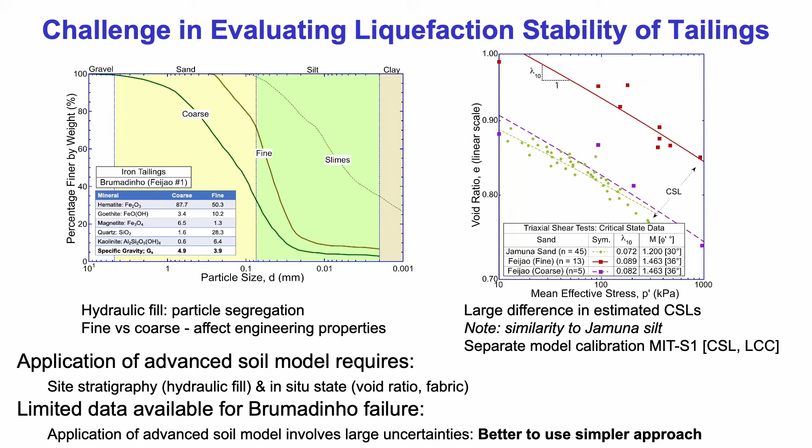Properties of the tailings vary depending on particle size distribution. Segregation produces different critical state line locations and particle sizes, so simulating the tailings with an advanced soil model would require very good knowledge of stratigraphy and in situ state. When we analyzed the failure in Brazil, we realized we just didn't have that data, and the advanced soil model would contain too many uncertainties.

So it became apparent we needed a simpler approach. We went back to numerical limit analysis, using extremely simple assumptions on the parameters of the tailings materials themselves. Our biggest uncertainty was in the stratigraphy, which we varied, computing upper and lower bound stability. The mechanisms of failure shown in the lower and upper bound analyses are basically the same.

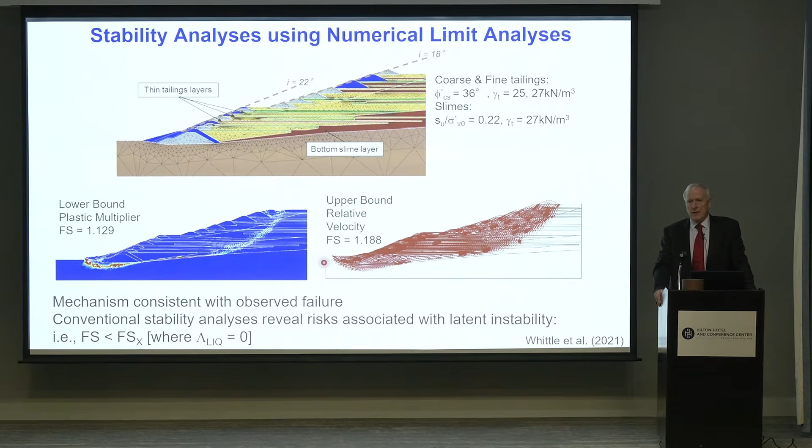They match what was observed in the field, and the factor of safety is incredibly low, 1.12 to 1.19. So the mechanism is consistent with failure, and essentially we found this structure was a disaster waiting to happen. The designers thought they had a much higher factor of safety than was actually operating, and our analysis revealed a minor perturbation could set this off. Now a lot of people are trying to figure out what that minor perturbation might be.

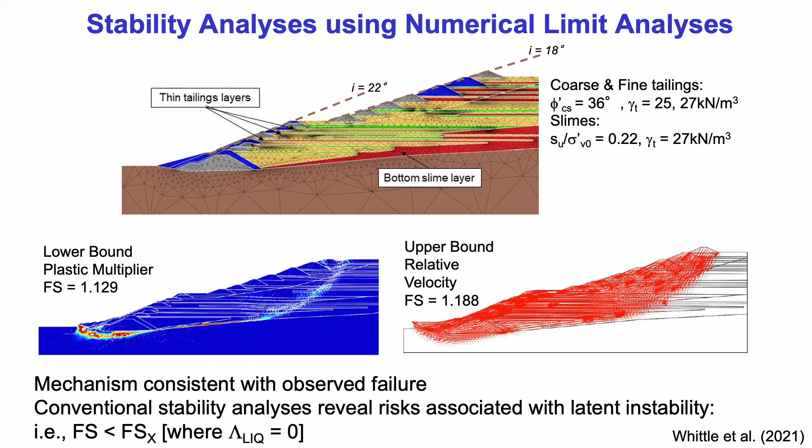They're referred to as lower sand, middle zone, and upper clay. These are residual soils, a residual soil profile. What's unusual is the sand is the unweathered material below the water table, 20 meters below the ground surface. The middle zone is more highly weathered, and the upper clay is very highly weathered material, so the parent material is a sand.

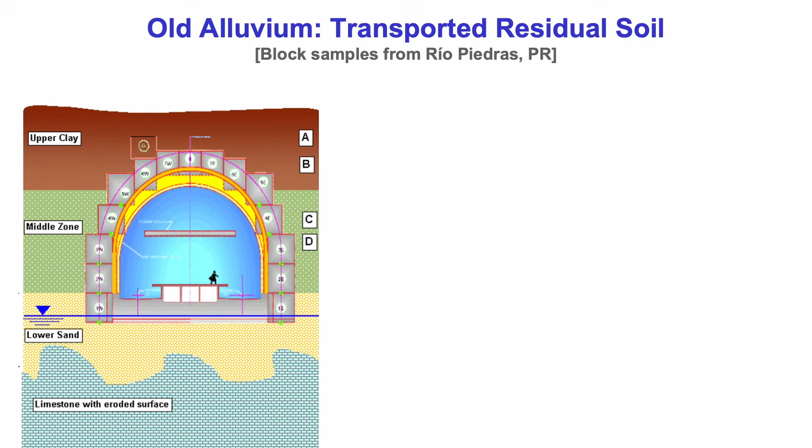There's lots of scatter in the conventional parameters that geotechnical engineers would obtain. The intact strength of the material, both the upper clay and middle zone, we obtained from block samples, and you'd say these are cohesive frictional materials. They look like cemented sands.

What you need to understand about this material is the particles are no longer solid silica particles, they're aggregates, made up of clays which are also aggregated. So there are multiple scales of porosity present. The iron oxide serves as a cement, and it suppresses the swelling behavior of the underlying clay mineral.

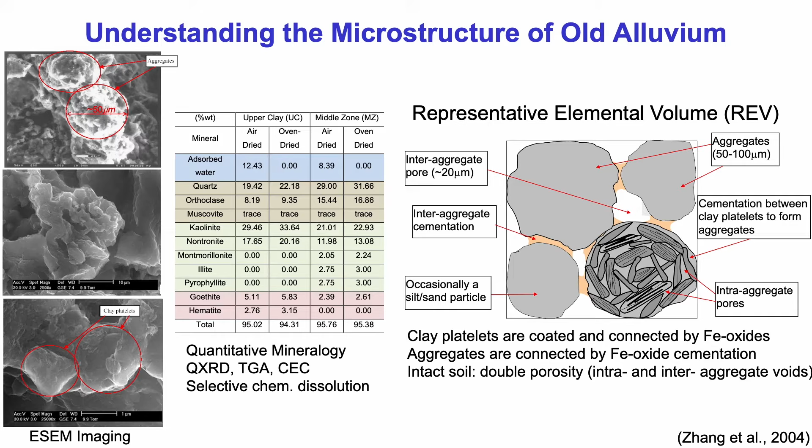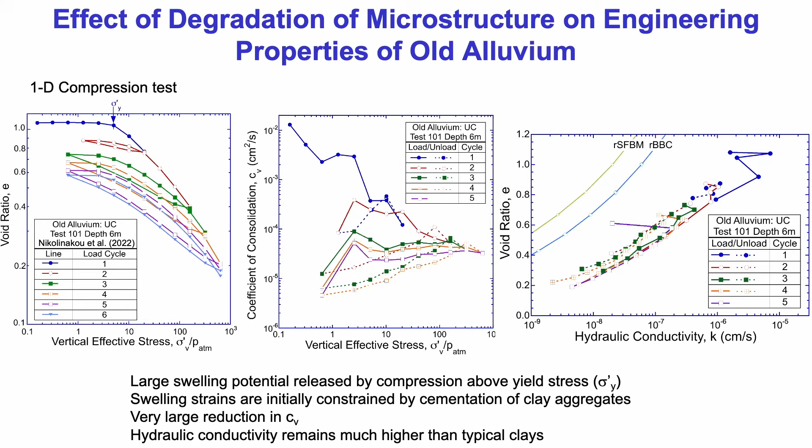We've tried modeling this. It's difficult to model, because we try to figure out how the disaggregation process can be quantified. We ended up using cation exchange capacity as a surrogate parameter because it would represent for us how much of the clay was available to swell.

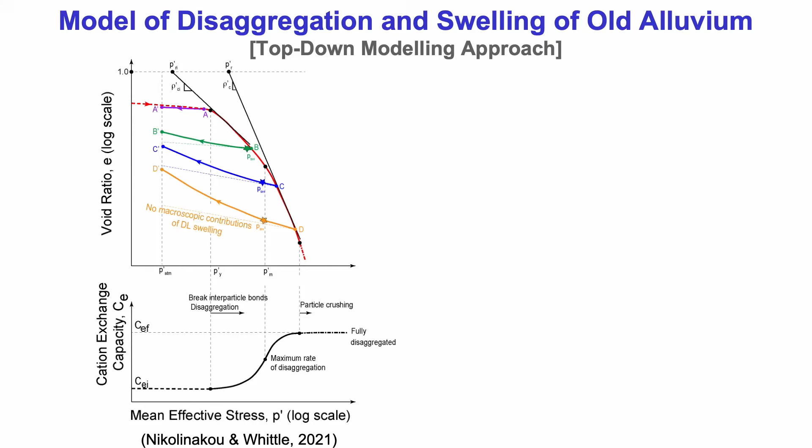So we built a model with Maria Nikolinakou that would represent this. In the process, we had to model or simulate the microstructure of the clay, which essentially involves electrostatic repulsion between clay particles, resulting in a swelling pressure at the macro scale. The mapping between micro and macro scale, we actually took some notice of work done by Alonso in the late 90s, and this is how we made this linkage.

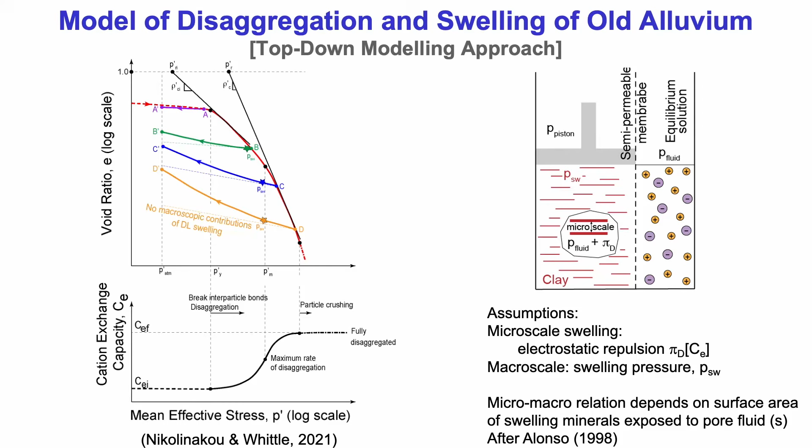We have a model which now describes quite well this very complex compression behavior. But what's most interesting about it is we've been able to take this and apply it across a range of depths within the clay. In other words, for the first time ever, our modeling approach is simulating properties and breakdown of different parts of a residual soil layer. So I think this is an unusual result. It's just one example.

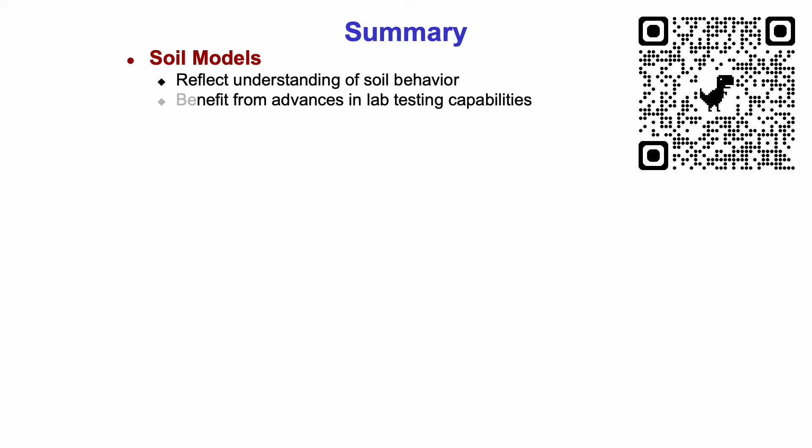Finally, to summarize, if you're interested for more details, by clicking on the QR code you can see the rest of the paper. So the soil models that I've described reflect an understanding of soil behavior, and really they've benefited from advances in lab testing capabilities. I've shown that accurate predictions are achievable, both of deformations and stability, but they always require good site investigation and careful model calibration. I've also shown that we can do credible scaling from laboratory to field in this process.

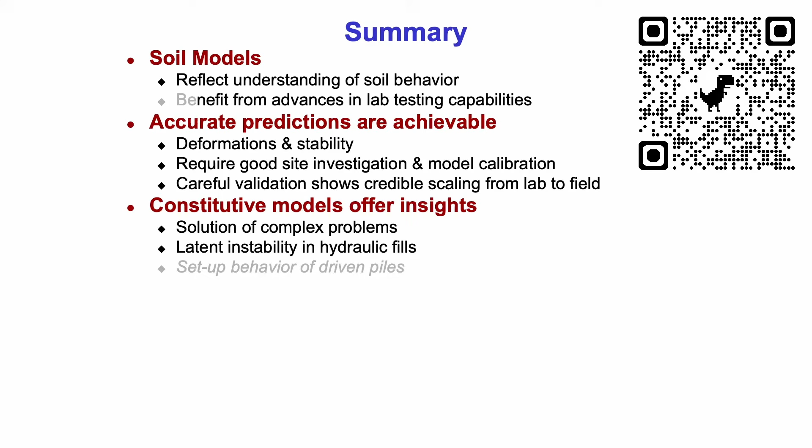The constitutive model offers some insights, both in the solution of complex problems, for example, that latent instability in the hydraulic fill tailings. And I've shown that we've learned from complex models to build simpler analysis, such as numerical limit analysis, to improve stability. And then finally, at the end, I've given an illustration of multi-scale models. The paper contains other examples, which I think will be of interest to some of you.

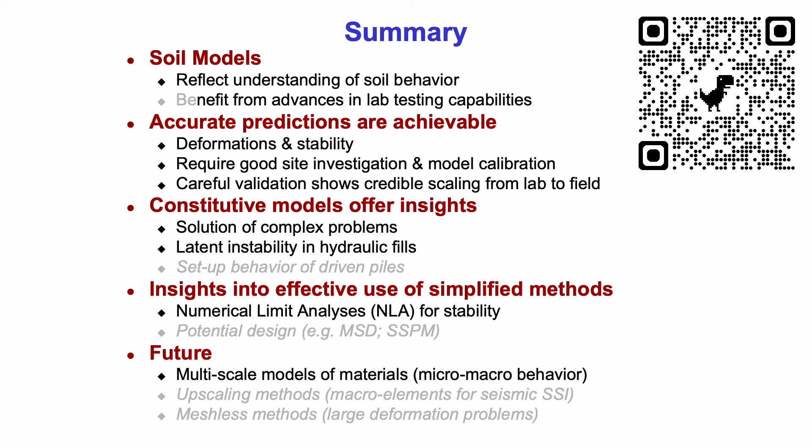So I'd just like to end by thanking or acknowledging people. I've got to thank, first of all, my wife, who has been incredibly supportive all these years. I need to thank my former MIT colleague, Jack Germaine, who really has taught me all about lab methods and soil behavior, and it's been a very productive relationship for many years that I value.

And finally, thank you all for your attention. And the motto to end with for me is, unleash your natural curiosity. There's always more to discover out there. Thank you very much.